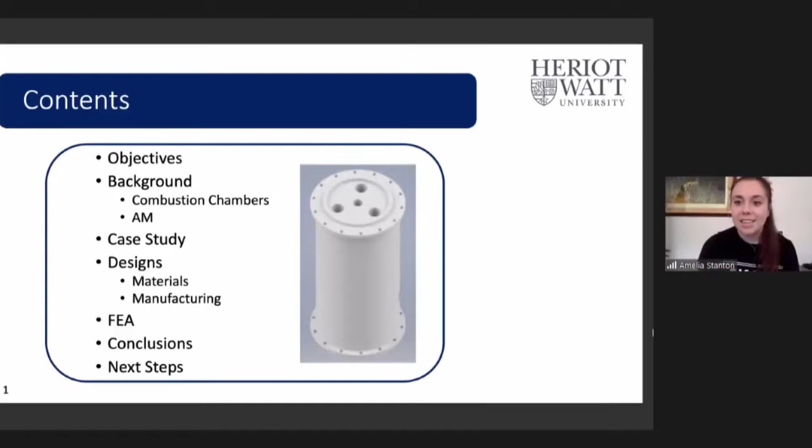Today I will be discussing the objectives of my dissertation, then go into some background research on combustion chambers and additive manufacturing for those who don't know about it. Then I'll talk about the case study I focused on, looking at design, materials and manufacturing techniques. I also did a finite element analysis and topological optimization, then I'll go through the conclusions and next steps.

The main goal of my dissertation was to look at additive manufacturing for combustion chambers to see if it can improve the design and the time it takes to manufacture. I've seen a lot of people doing research in additive manufacturing, but not in engine parts as big as combustion chambers. That's the main reason I wanted to look into it, because combustion chambers are quite complicated, with really complicated internal designs because of the cooling chamber.

So I looked at different current projects that didn't really use additive manufacturing, and I found one by a couple of universities in Colombia called the SUA11 rocket engine. My goal was to try to improve it and reduce the weight, lower the number of components used, and reduce the costs.

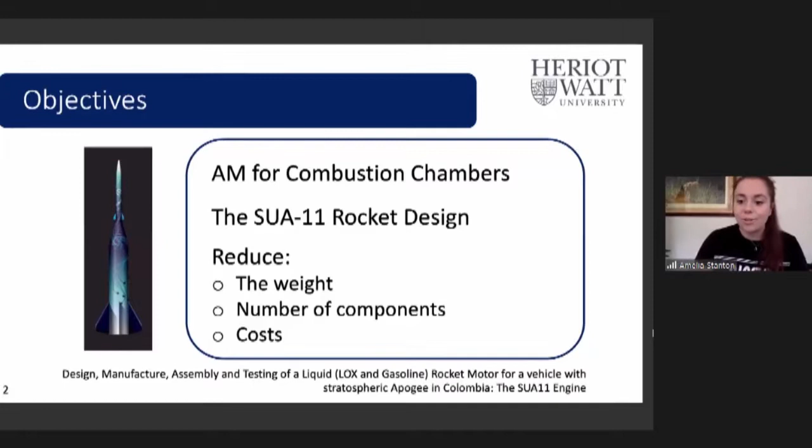Additive manufacturing is the process of adding material in layers to form an object. It's like 3D printing, which I'm sure most of you have heard of. You print out layers individually, and this allows you to make more complicated designs, freeform fabrication, and also reduce costs because you don't need to worry about assembly processes afterwards.

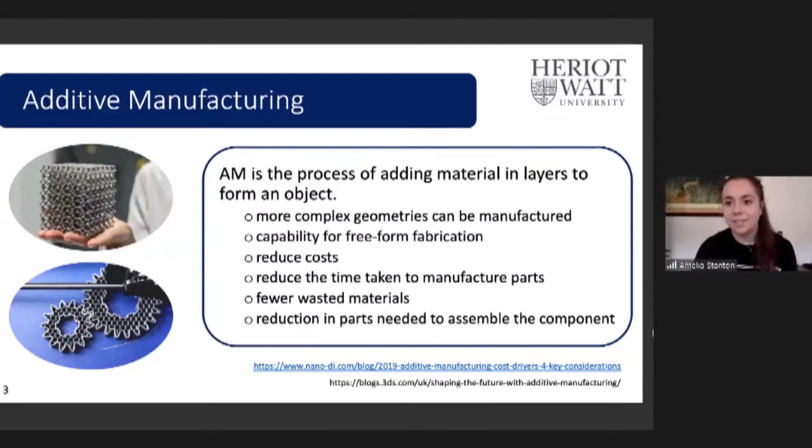You don't need to individually manufacture - say if you were using milling techniques, you'd have to mill it, then go on to a different process to create your whole finished project. With additive manufacturing you also reduce waste materials, which helps the cost, and reduce the number of parts needed for assembly.

In additive manufacturing, it's typically split into two types of systems: bed systems and fed systems. Bed systems are a process where the material lies in almost a bed formation - imagine a mattress - and the material is normally either in powder or liquid form. A laser is shone onto the bed and melts the powder or the material, and as soon as it solidifies and dries, it starts to form the shape and builds up like that.

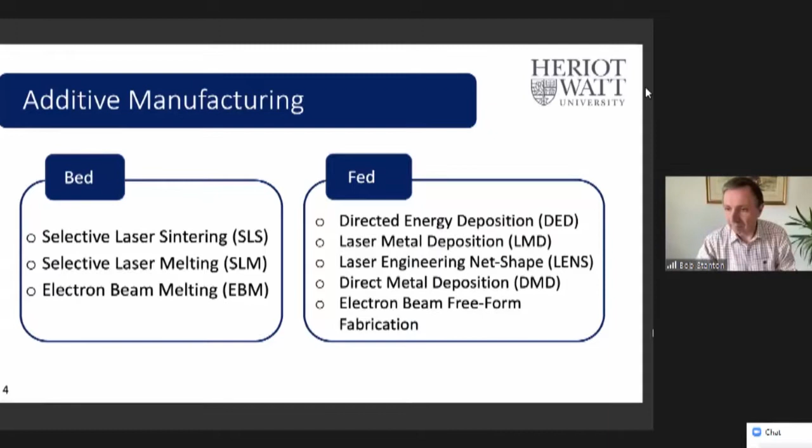A fed system is different - trying to explain it in simplest terms, imagine a water gun. It's like that, but imagine it being a stream of metal material with a laser pointed onto it, melting it, and as it moves around the machine it's able to form an object. These are different types of processes used for each of these additive manufacturing concepts.

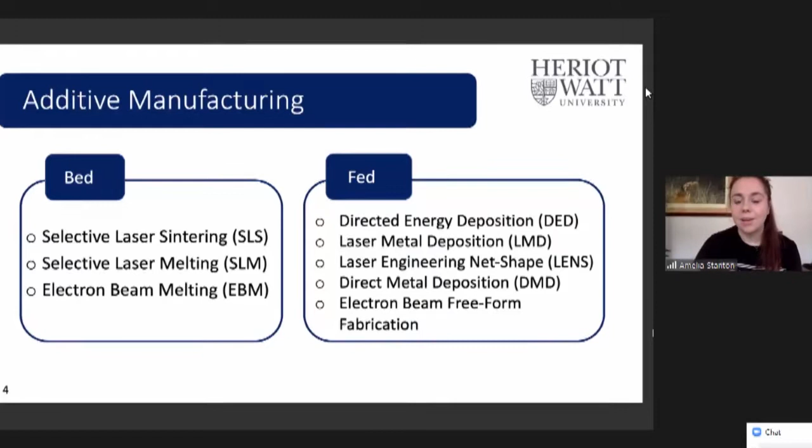This is more recent research that's been done. Currently, in June this year, Westcott Catapult has invested in MetalFAB1 additive manufacturing systems. This will be used for rocket propulsion products, like with drones and other autonomous systems.

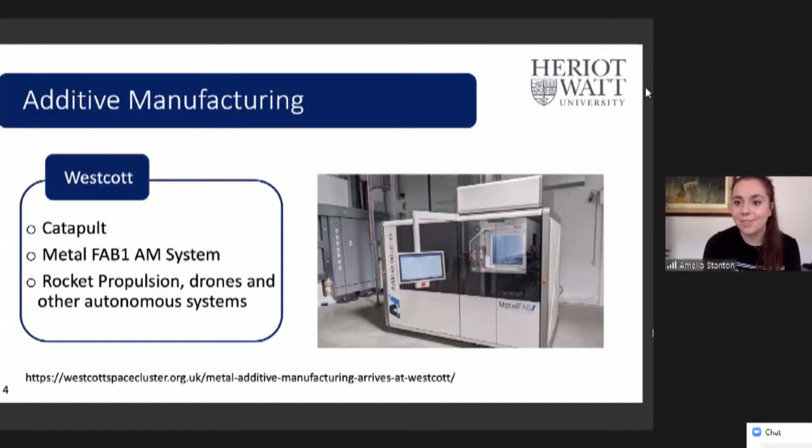That's very exciting. Then there's Relativity Space - I learned about them recently. Two guys came together, one from Blue Origin and the other from SpaceX, so very smart people. They decided they want to build a rocket engine, the full rocket, completely from additive manufacturing, and they've started doing that and come on leaps and bounds. They've just invested in a huge warehouse and hope to make a fully autonomous rocket development center, so they can build everything in a workshop with no people needed.

By doing this, there will be fewer parts needed, very fast production times, and you won't need any fixed tools.

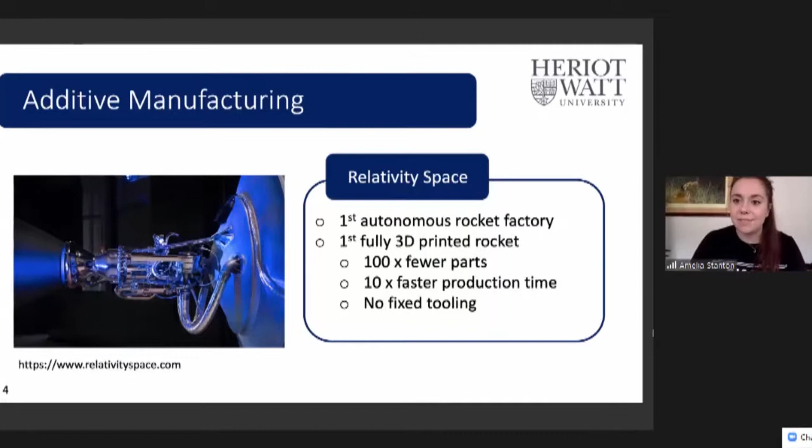So combustion chambers. If you're not sure what one really is, a combustion chamber is the part of the rocket where your oxidizer and your propellant mix together to form thrust, and then it goes right down through the nozzle, and that's what makes your rocket move, basically.

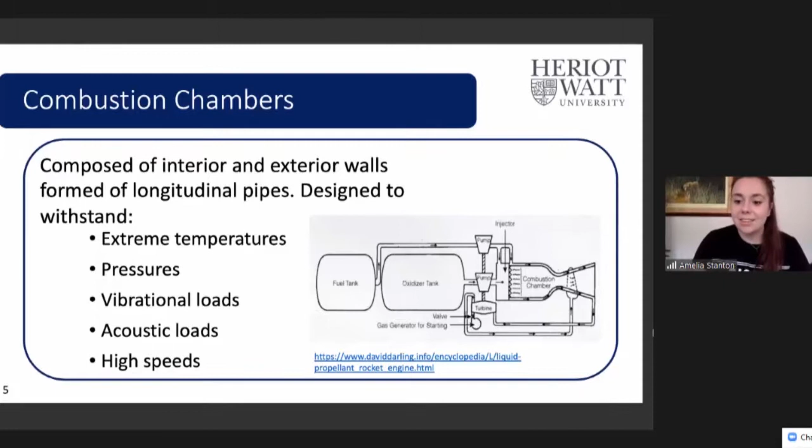So the case study I used was the SUA-11 engine. This is from the AINKAA VI rocket, which was another project done in Colombia. The aim was to get it from sea level to an altitude of 14 kilometers. As you can see by some of the images, it did not work when they tested it. There was an error where the combustion chamber exploded because it got to too high a temperature, and the material and design could not withstand that sort of force.

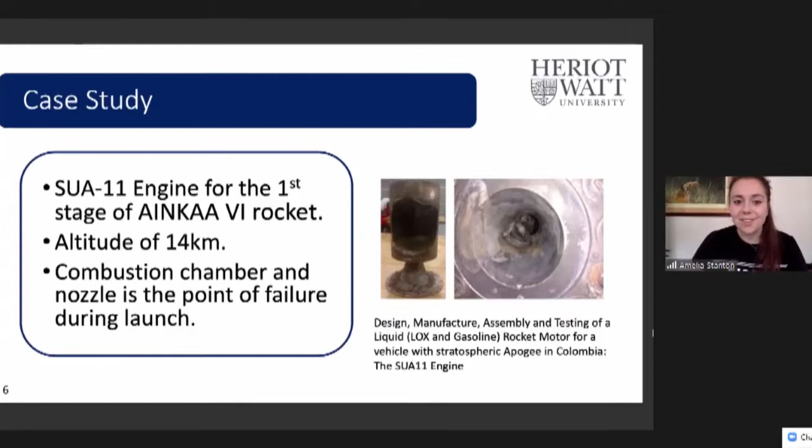So when I looked at my design, I looked at materials to start off with. They used an SAE low carbon steel. Low carbon steel is really good because of the cost, it's really cheap, and it's easy to manufacture with.

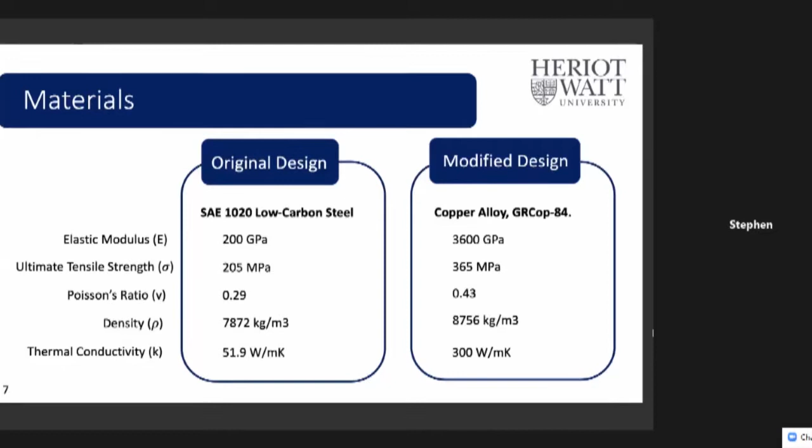However, if you compare it to a copper alloy, this copper alloy is actually invented by NASA. The difference in elastic modulus, tensile strength, Poisson's ratio, density, and thermal conductivity are quite different. The density for the copper alloy is a bit higher, but since it's got higher elastic modulus and tensile strength, it will counteract that, so you don't need as much of it for the same amount of stability when you're designing. The thermal conductivity also makes it better for a combustion chamber because of the extremely high heats.

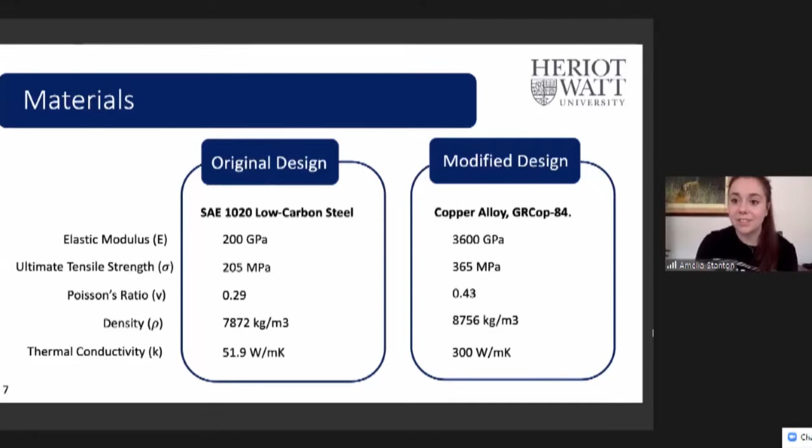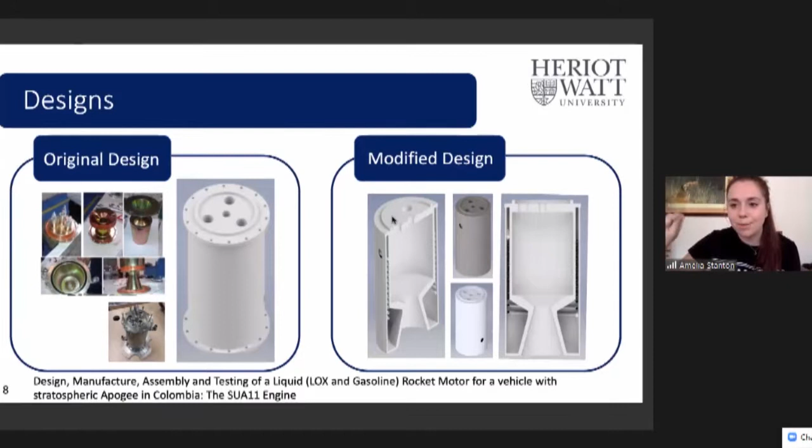They used 6 different components when building it: the nozzle separate, the combustion chamber, the cooling system, and all the valves attached to it, all different components. So you have to go through a massive assembly process, whereas mine is all made with one component, as you can see. It's got all the main things, but less material is needed because you don't need bolts to screw parts together since they're already built as one.

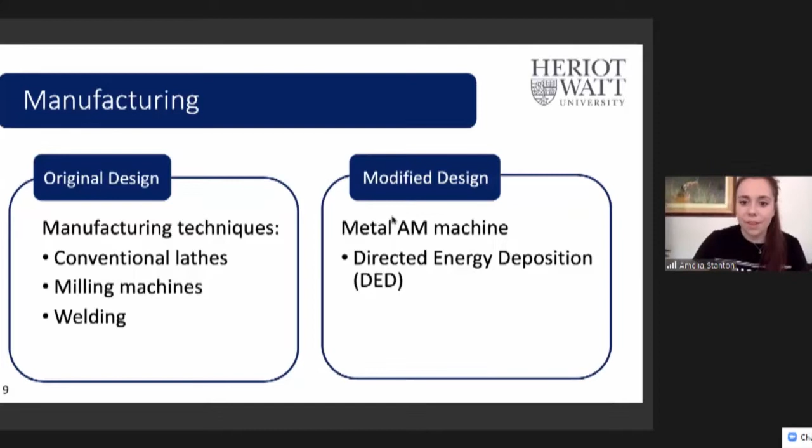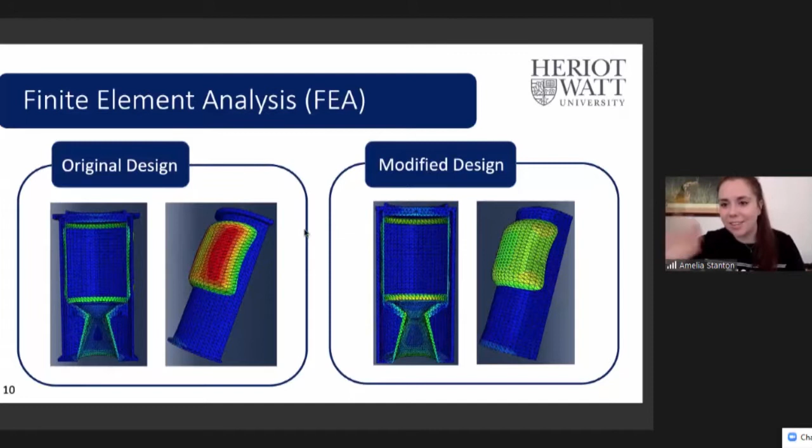So as you can see, for the original design, I did a finite element analysis and then compared it to my modified new design. In the original design, there's a bit of a difference, with clear deformation on the outside of the combustion chamber, and the red highlights how high the pressure is on the outside—not very good. Whereas mine is green; there is still some deformation, but this was later handled in the topological optimization.

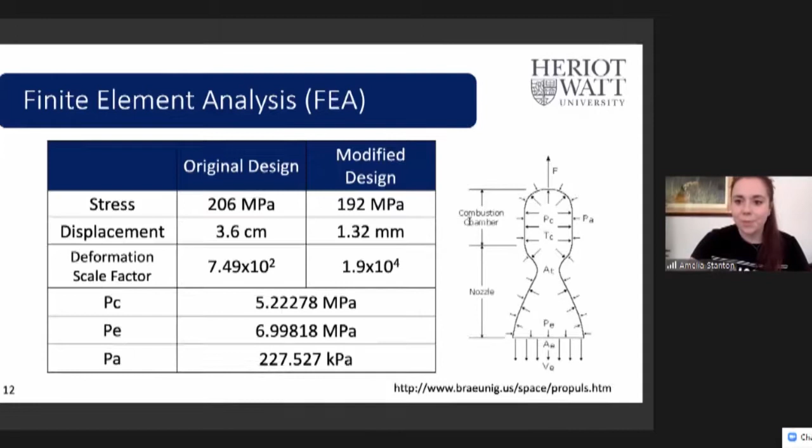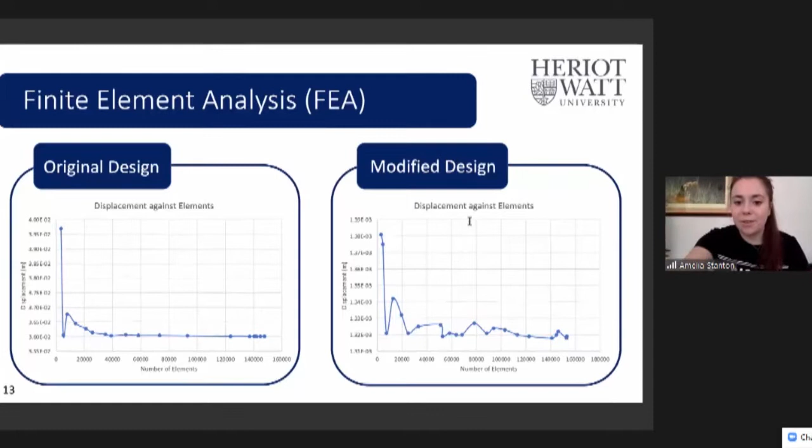Okay, so this shows the displacement between the two. Mine does look a bit more jagged, I am aware - there were a few anomalies, but as you see, it curves down to a lower displacement. Mine is in millimeters and theirs is in centimeters. So imagine you've got a small combustion chamber and then you have a few centimeters displacement - it's not good. Whereas you want minimum displacement while the rocket is being launched, so everything else will stay in place and you don't basically explode your rocket.

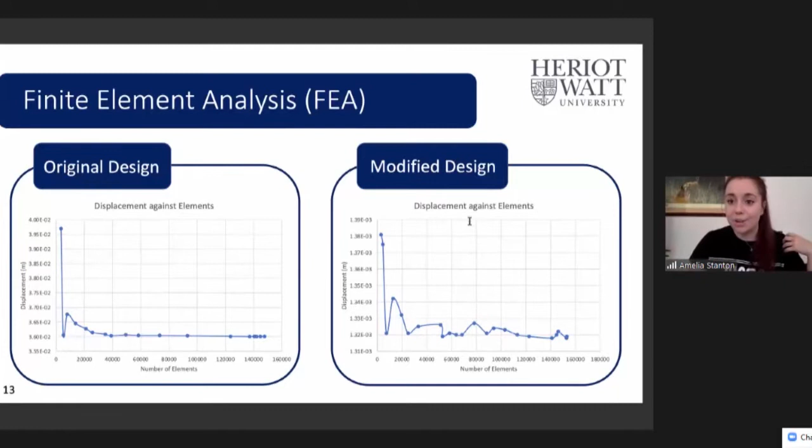And then finally, I did a topological optimization. So what this does is it looks at your design and goes through the FEA, and it sees where the points of failure are, and it looks at where you've got too much material, where there's minimal stress. So it looks at ways to reduce the material you need to finish the design.

So then this looks at the stress - it's like von Mises stress. As you can see, mine has no stress displacement on the external wall, whereas there is significant displacement on the external wall with the original design, of like 1.83 times 10 to the 8, so 183.8 megapascals. My slides are unfortunately covering up... okay, so yeah, 129.3 - a significant reduction in the pressure acting on the outside of the wall of the combustion chamber.

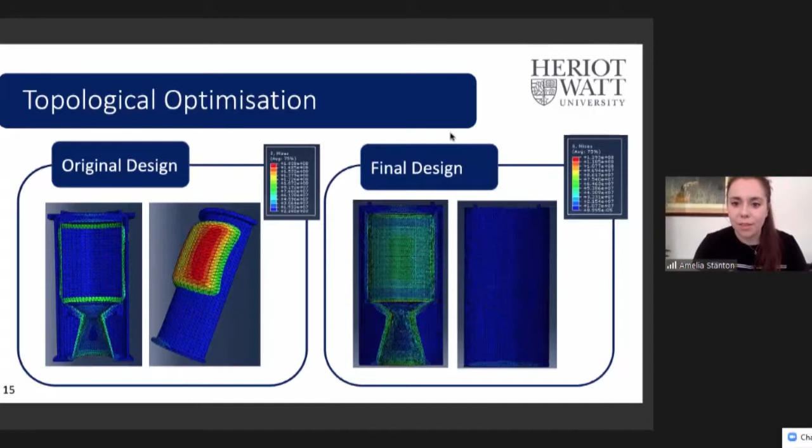Okay, so in conclusion, I was able to reduce my number of components from 6 to 1. The mass of the modified design did increase from 4.47 to 5.17. However, since the original design didn't work, as it clearly exploded, you needed the extra material. And if you look at the manufacturing processes and materials, mine would have turned out as a lighter weight compared to theirs, if it was the same sort of process - mine would be weighing a lot less.

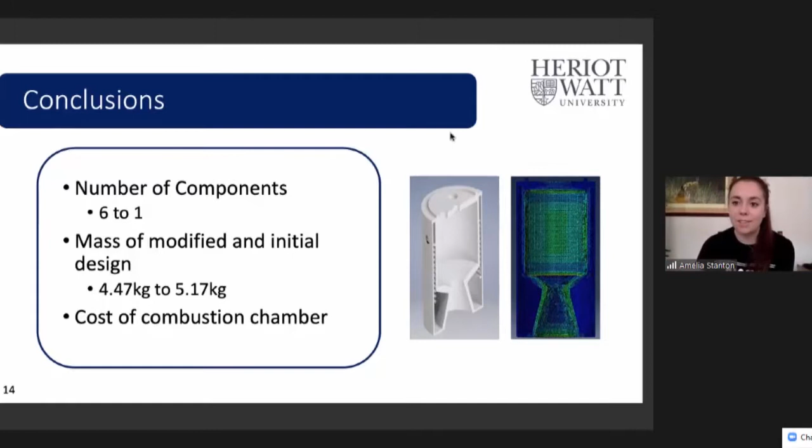And then the cost of manufacture - so even though the cost of my material was higher, the cost of the manufacturing processes, the material, and all of the software that they used - it would have been more expensive to do their version than mine. And then they obviously didn't go through the same analytical techniques, so they had to build it, watch it explode, and then rebuild it. Whereas I can see where all my errors are, where everything has gone wrong, and so that will also reduce costs.

Okay, so the next steps would be to perform CFD, computational fluid dynamics, so I can see how the fuel interacts in the combustion chamber. I can make any improvements from that and perform thermal and vibrational finite element analysis on the internal and external walls of the combustion chamber and look at how the heat flows from the inside to the outside through the cooling chamber.

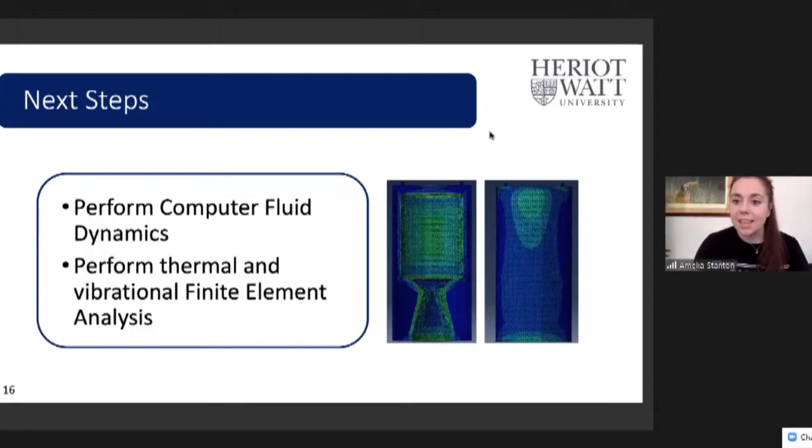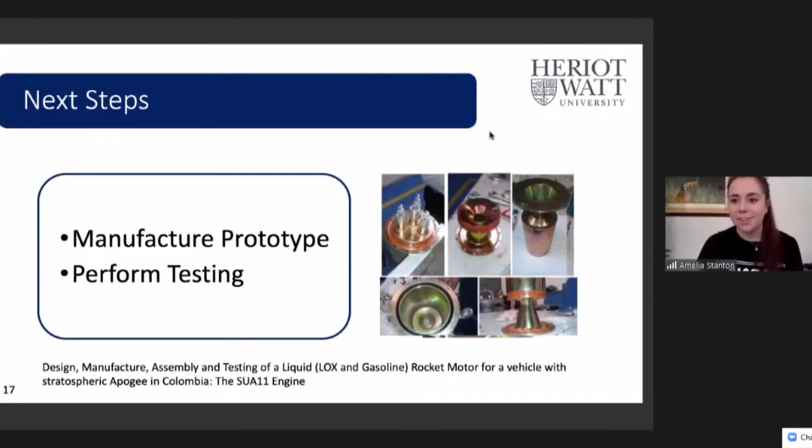And then I will be manufacturing a prototype and perform testing in the workshop to make sure that everything is running smoothly before we start full-on development with proper materials, proper costs, everything. So yeah, thank you very much for listening. I will take any questions if you have any.

Do you want to kill your presentation? Oh, thank you, Amelia. Thank you. Brilliant. Great presentation. That's it. Oops, am I muted still?

No, good. Like me, you talk really quickly, especially when you're excited about something, so we've done it in almost record time. I think we only had one speaker faster than you. So I'm now ready to take some questions. Let me just pull up the chat.

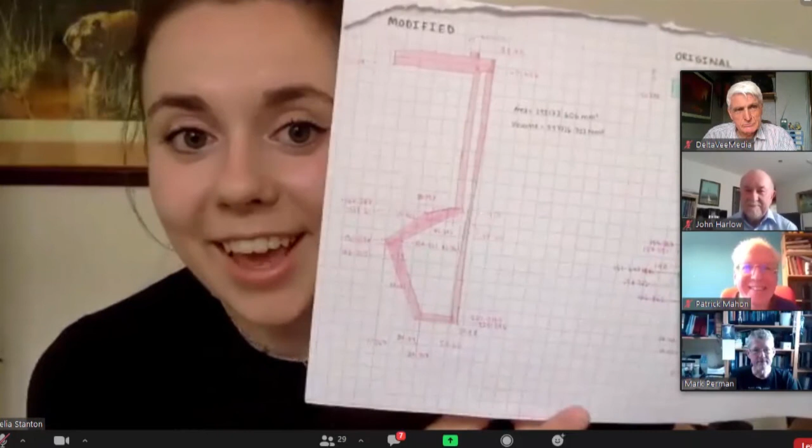I'll try. Can I just say, I know people can't see, but you've actually got the initial sketch that you did just by your side - can you show the remaining people there? You actually did start low tech before you used the CAD system. I am also a bit of a child and coloured them in, but yeah, this is sort of how I designed them to make sure that they're all one component rather than multiple. So this is how I drew them up on the FEA. Definitely low tech, a bit childish, but yeah.

Richard says back of the envelope.

Okay, so I think, is there any more questions before I end today's session? And George Kersey says low-tech approach can work very well. Absolutely. In which case, I'm going to call an end today.